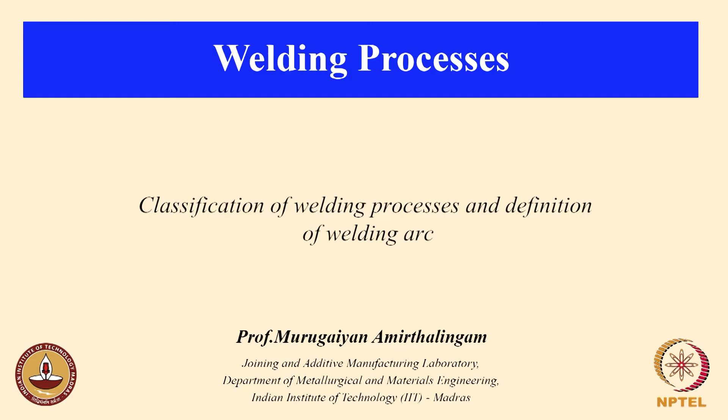So, the first question I ask when I begin my class is to define welding. Okay, so what is welding? I want answers. Joining? What is joining? So a definition should be self-explanatory, right? It shouldn't raise another question. Okay?

Again, come on. What is welding? Come on, guys. So you are joining, right? So what do you mean by join? What is it? Come on. Yes, go ahead. Bonding? Okay, so bonding, right? What is bonding? Something happens, right? You have one metal and another metal, and you want to join them. What happens?

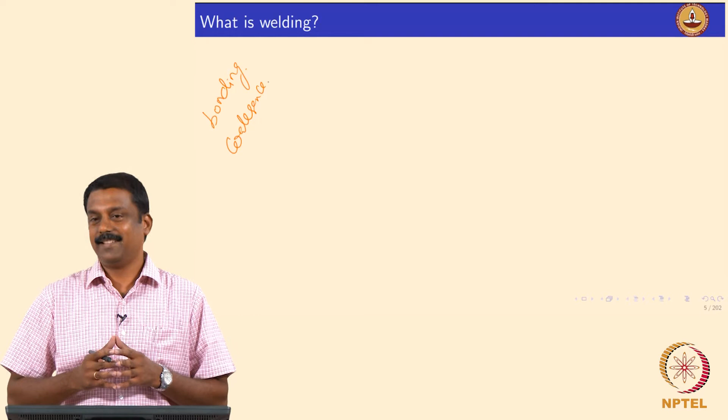Formation of bonds. Okay. How do you form a bond? The metal is fused to each other. What is fusion? Coalescence. Yeah, I heard the word coalescence. Okay. What is coalescence? Coalesce. What is coalesce? It's mixing, right? So what is mixing? Something is mixing to create a bond. Okay. So what is mixing?

So you have one block and the other block, and you are trying to mix them together, for example. So what happens? You have one phase and the other phase, right? So you have interfaces. Two interfaces are there. What happens to the interface? They become one. How? Two interfaces become one interface. Something is moving. What is moving? Atoms are moving. Then atoms move, and then the bond takes place, right?

So if one atom moves from this place to another place, what do you call that? Yeah, diffusion in metallurgical terms. It is simple physical movement, isn't it? And then if they interact, what will happen? They will also chemically interact. So they physically move and chemically interact to create a bond, so that two interfaces become one interface.

So now if you want to define welding, how do you define it? It's a physical and chemical mixing of interfaces, a physical and chemical coalescence of the interfaces, isn't it? You are physically mixing as well as chemically interacting, so that two interfaces become one. So where is the driving force? You are reducing surface energy, so two interfaces become one interface.

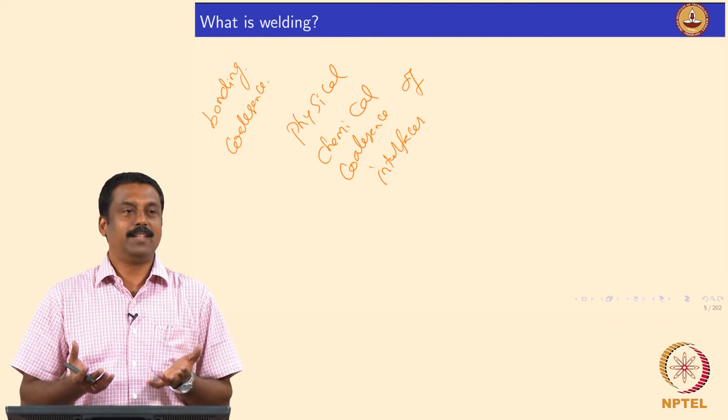But can it happen without applying any external driving force? No, right? So then what do we do? Yeah, you need to apply heat or pressure. Very good. So we have all terms defined: physical, chemical, coalescence of interfaces. Do the interfaces coalesce by themselves? No, we need to apply some driving force. How do you give the driving force? By giving some energy to the system, by heat or pressure or sometimes both.

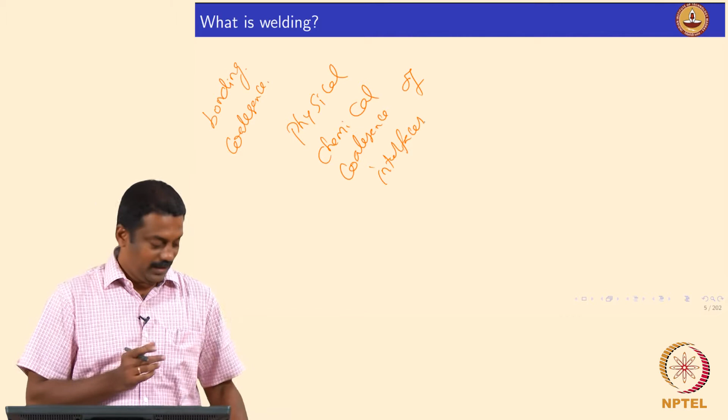So we can now define welding in classical terms as physical and chemical coalescence of interfaces by the application of heat and/or pressure. This is the classical definition, because everything is covered. A definition should cover all the physical phenomena happening in a process. We have physical as well as chemical coalescence of the interfaces, made to happen by application of heat or pressure or both.

Whenever someone joins my professor's group, the first question he asks is this, and how well you answer it determines his teaching. So I will also judge you by the definition, so that I can define my level of teaching. Okay, now I understood the level. Okay, good. So now we have defined welding.

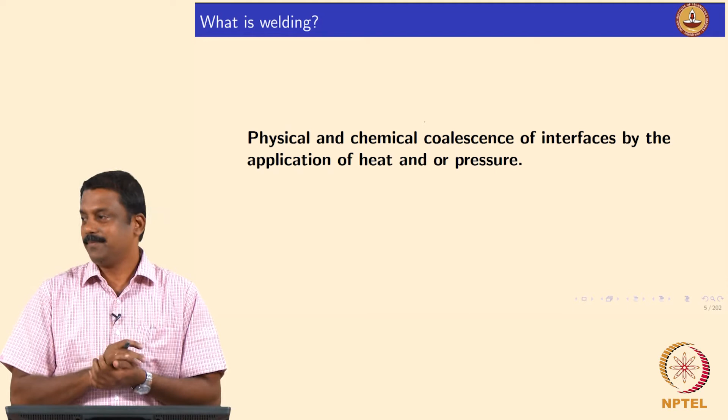So you have the welding process defined, but the next question is, why welding? Why can't you join two parts with a bolt? Corrosion? Yes, there is a dissimilar junction created when you use mechanical joints, which means there is a potential difference. That is not good from a corrosion point of view. The other advantage is weight reduction. A mechanical connection adds more material, so component weight increases. The weight reduction by welding is enormous.

It is also homogeneous physical and chemical coalescence, so there is no real sharp interface and corrosion problems are not there. You gain the advantage of not using mechanical connections and weight saving. So welding is advantageous in engineering because you avoid sharp interfaces which can lead to corrosion or load partitioning, where stress always acts on the weaker member. The interface becomes relatively smoother, and you gain the weight advantage.

So, these are the main engineering advantages you gain by using welding, and the joint becomes much stronger than mechanical connections because of the removal of the sharp interface. So, when you use mechanical joints, obviously the load will be distributed differently, right. Yeah, it is clear. So, there is the advantage of welding compared to the mechanical connections.

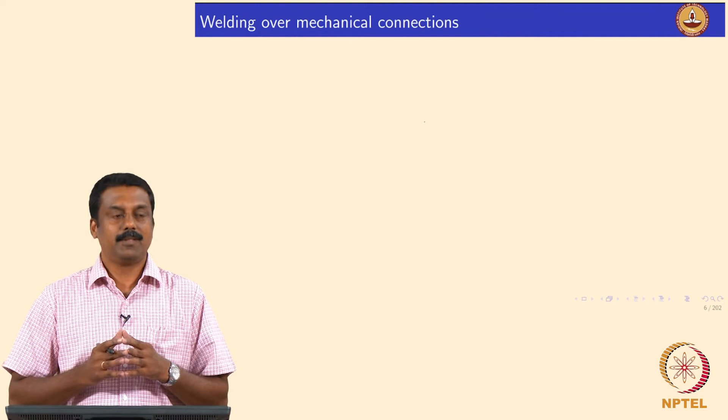Yes, it is clear. So, now having understood what is welding, why welding, we will go in deeper. So, we look at what are the common welding processes that are available currently for engineering applications, and how we can classify them, right. Okay. So, if you look at the common welding processes, we can classify them into two, again from the definition. So, the definition says heat or pressure.

So, we can classify the welding processes into those that use heat to weld, and the welding processes that use pressure or load to weld. So, this is a very major classification. There are various classifications possible inside each process and each methodology. So, generally the common classification is those that use heat, or fusion welding processes, and the pressure welding processes.

In both cases, for example, in fusion welding processes, you will also apply pressure in some cases, but if the heat is rate controlling, then it is commonly known as a fusion welding process, or if the load is rate controlling, then it is a pressure welding process, right. It is clear. But again, this is not a really good classification, because, as I have been telling, right.

So, we can either use heat or pressure, or sometimes we use both, where heat will be rate controlling and the pressure will be assisting the coalescence. Whereas in the other case the pressure is rate controlling, where heat is also used to ease the coalescence. Okay, so we can broadly classify the processes into two major classifications, whether you use fusion or heat mainly as a heat source, or pressure, as a way of making our joint.

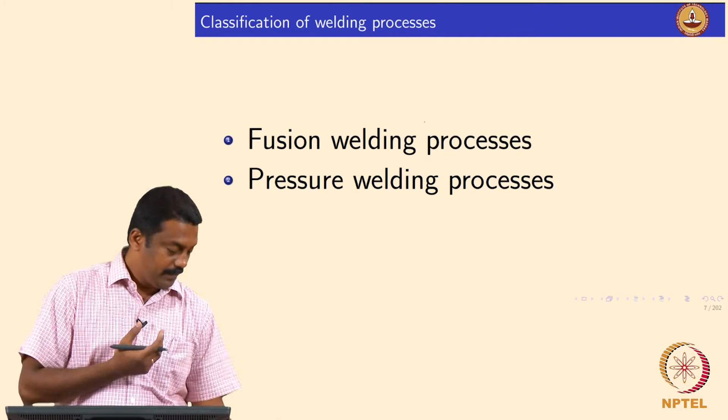Okay, so suppose you make a welding process where you have a liquid presence at the interface, we call it a fusion welding process. Okay. If the interface is not molten after welding, if you make a bond in solid state, there is no liquid when you make a joint. Okay. There are a couple of exceptions, but the generalized rule is, when a liquid is there at the interface when you are joining, that is known as a fusion welding process.

So based on the heat generation mechanism and how we change the process, by changing the consumable, the electrode, the gas, the atmosphere, or changing the heat source from arc to say plasma or laser or electron beam, or you generate heat just by resistance heating, you still have a liquid. So if liquid is there, we call that process a fusion welding process.

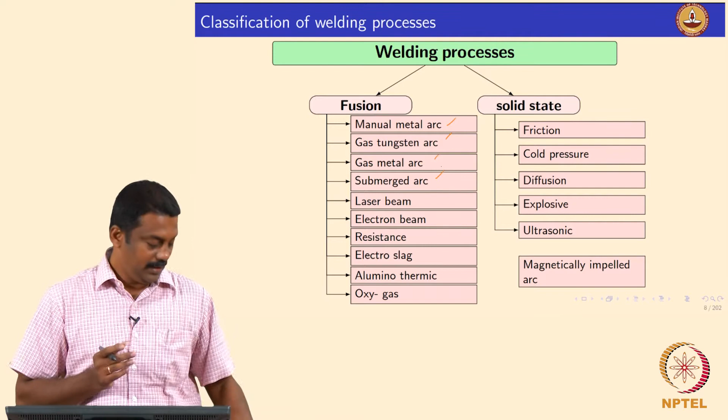Okay, so, we look at all the physics behind these processes, and then we will move on to the solid state process, right. We will move on to the arc welding process. So, that is the first chapter. Yeah.

The first question again, I will start with the definition. So, if you are clear about definition, you are also clear about the concept. Let us define arc. So, what are the important parameters or the fundamental rate controlling factors you may expect in arc? What is it? Potential difference. Quite high potential difference. That means voltage is high. Wrong.

Electrons and ions. Okay. Why do you need electrons and ions? Suppose if you have a conductor, you pass a current from say this point to this point. It can travel, right? The electrons are charge carriers. They can be transported as long as you have a potential difference, right? So, how do you define the charge carrier? There must be unit, right? What is unit of this charge carrier? Coulomb. Good, very good.

What is Coulomb? Yeah, you feel free. I am not going to scold you if you say wrong answers. Something is moving, right? What is moving? Electrons are moving. Very good. So, what is the relationship between the electrons and coulombs? 1 coulomb is equal to 6.242 into 10 to the power 18. Okay.

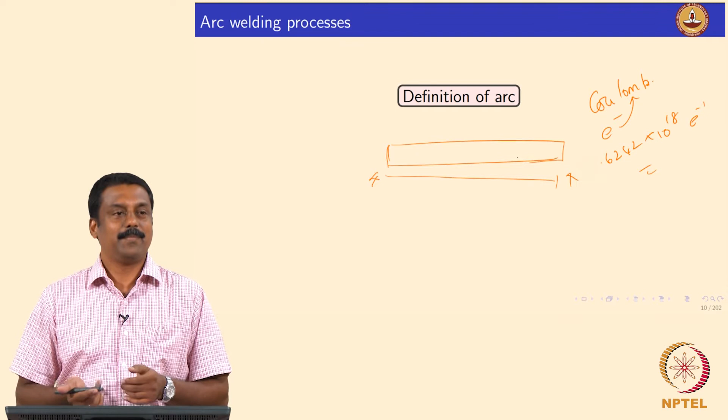So, I use the word potential difference, you also use potential. What is the potential difference? What is the unit of potential difference? Volts. What is volt? Definition. When do you say 1 volt? There must be a definition, right? So, these are the basic definitions you need to understand. Come on, go ahead. Some words, some terms you can give.

You have defined coulomb, okay. So, if 1 coulomb travels over a potential difference in a second over a unit length, it is 1 ampere, right. So, what potential difference can give you 1 volt? Yes? So you need to think about energy. Electrons cannot travel by themselves, right? What is the driving force? What is the push? You need to do some work, right? For electrons to move from one place to other place. How do you define that?

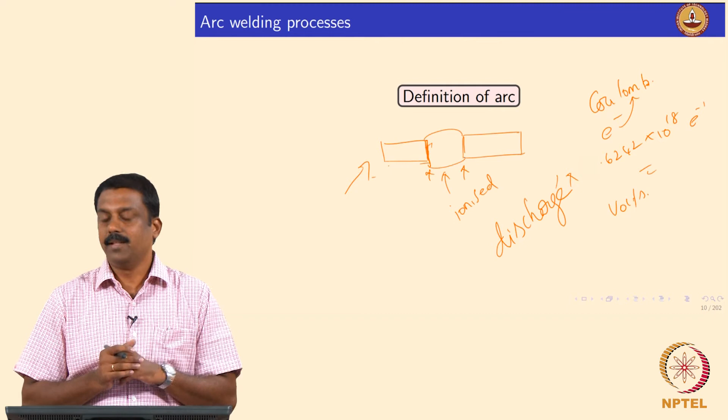So, if you look at the varying current and voltage, there are three types of discharges which are observed when a carrier passes through a gas medium, okay. The three discharges are known as the Townsend discharge, glow discharge and arc discharge, okay. And these are all stationary. If you look at the natural discharges like spark or lightning, they are momentary, not even a second, right? If lightning is sustained more than a second, then you have a problem. So, these are momentary, the spark and lightning.

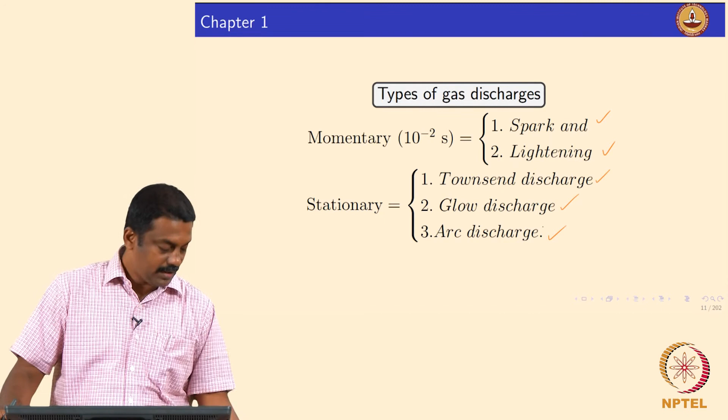But if you turn the lights on, the glow discharge, as long as you have the energy, the glow discharge is sustained, isn't it? If you switch off the input charge carriers, then the discharge also decays. So, you make it sustained, right. So, the only difference between these discharges is the amount of current and voltage, right. So, if you want to define an arc, it is the sustained discharge of atoms and molecules between a potential difference. By doing so, the movement of electrons and ions is carried out.

Okay. So, it is a sustained electrical discharge in a gas. And what do you mean by discharge? Creation of the avalanche of ions and electrons. By doing so, we can conduct the energy, or the energy carriers can travel from one interface to the other interface by the movement of the free electrons and ions generated by this discharge, right. Is it clear? So, there are three possible discharges, and we can classify them based on the current and voltages, whether it is arc discharge, glow discharge or Townsend discharge.

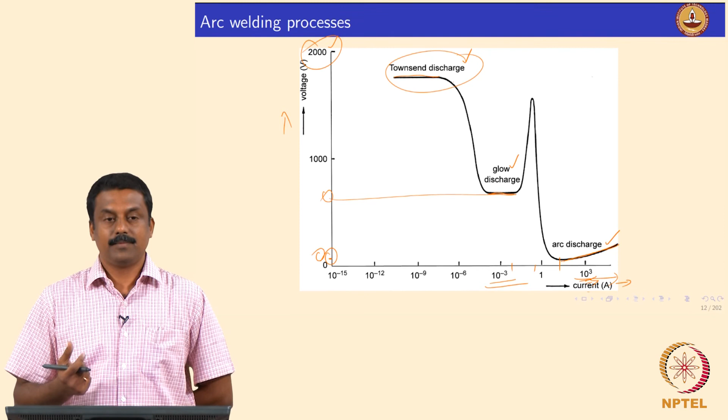So in order to do that, you need a sustained discharge. You need to keep on generating the electrons and ions. I hope it's clear. So we'll finish this, and then we'll continue from next class. Any questions?

So, to summarize, we looked at the definition of welding itself, then we moved on to why welding, then we classified welding processes based on heat or pressure, or fusion or solid state, and then we started looking at the very important arc welding process, and we defined what an arc is. We'll go even deeper in defining the arc: what the discharge mechanisms are, what discharge is, why discharge, how heat is generated by this discharge, and what factors control the discharge. We'll look at all the physics. These are all high temperature plasma physics. We'll see next class.